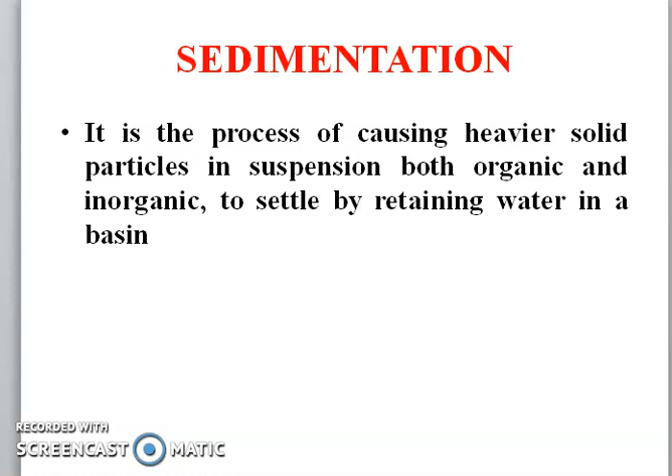Now we will study about water supply and treatment in the third module, sedimentation. What is sedimentation? It is the process causing heavy solid particles in suspension, both organic and inorganic, to settle by retaining the water. This is called sedimentation. It works on the gravity force. All the suspended particles will settle down. This is sedimentation.

The particles heavier than the water tend to settle down due to the force of gravity. Impurities in the water are held in suspension due to the turbulence of the moving water. When the velocity of flow is reduced, the suspended particles tend to settle down at the bottom of the tank. This phenomenon is known as hydraulic subsidence. This is the theory.

Particles heavier than the water tend to settle down due to the force of gravity. Impurities in the water are held due to the turbulence of moving water. When the velocity of flow is reduced, the suspended particles settle down at the bottom of the tank. This is the theory. Then we go to the next slide.

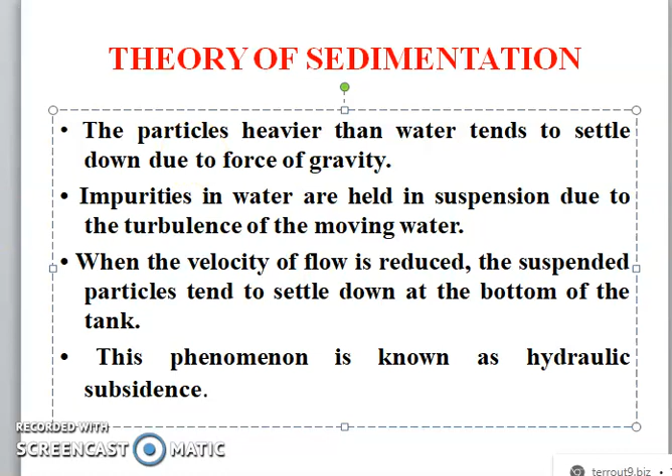Factors affecting sedimentation, very important. First, size, shape and weight of the particle. Viscosity and temperature of the water. Surface overflow, surface area, velocity of flow, inlet and outlet arrangement, detention period, effective depth of the settling tank, concentration of suspended matter, wind blowing on the surface area of the basin, and biological, electrical and other forces. These are the factors affecting sedimentation.

It's very important. Size and shape, weight of the particle, viscosity and temperature of the water, surface overflow, surface area, velocity of flow, inlet and outlet arrangement, detention period, effective depth of settling tank, concentration of suspended matter, wind blowing on the surface area of the basin, biological, electrical and other forces. These are the factors.

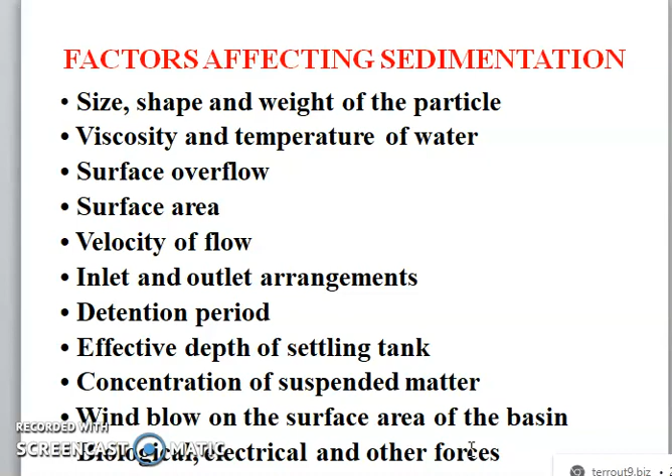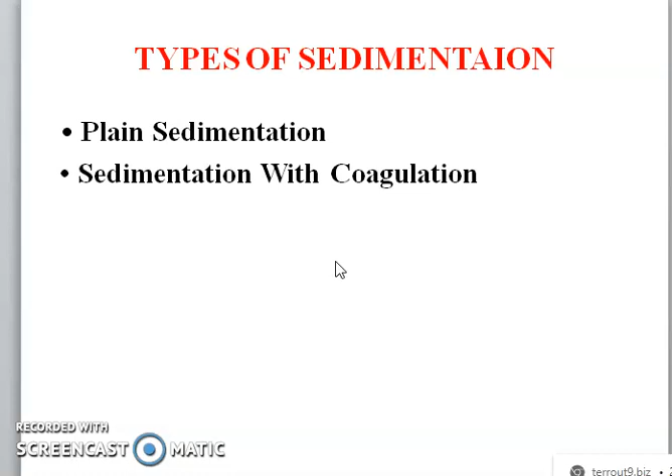Now we go for the types of sedimentation. Very important. There are two types of sedimentation. One is plain sedimentation, the second is sedimentation with coagulation. In plain sedimentation, without adding any chemicals, suspended particles come down due to gravity. It will take time, the detention period. In sedimentation with coagulation, we are adding chemicals to the water. It will help the water settle.

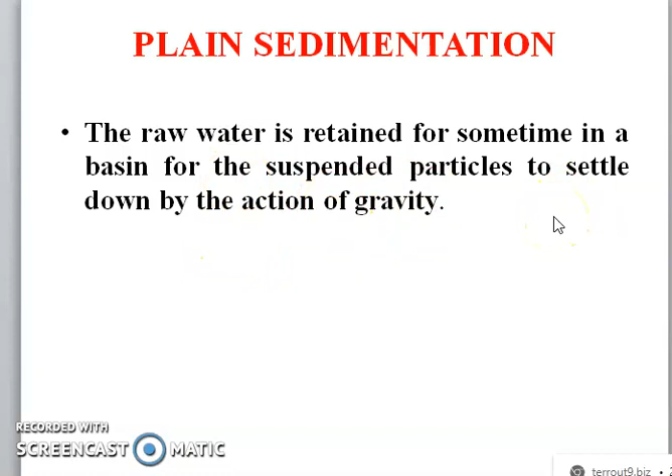Now, plain sedimentation. What is plain sedimentation? The raw water is retained for some time in the basin for the suspended particles to settle down by the action of gravity. This is called plain sedimentation. Sedimentation with coagulation: in this, some chemical compounds called coagulants are added to water to assist the sedimentation.

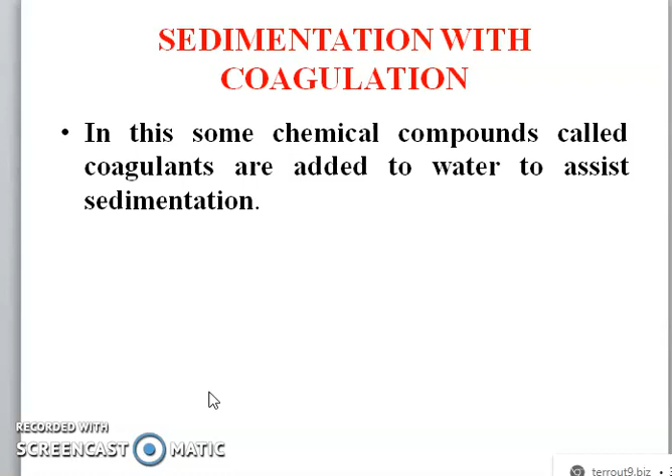Next, this is the coagulation process. You can see the slide. Coagulants are added to the water, mixed in powder or solution form. The coagulant forms a floc trapping impurities, like a ball shape. Then it will come and settle at the bottom. This is the total picture of how the coagulant works.

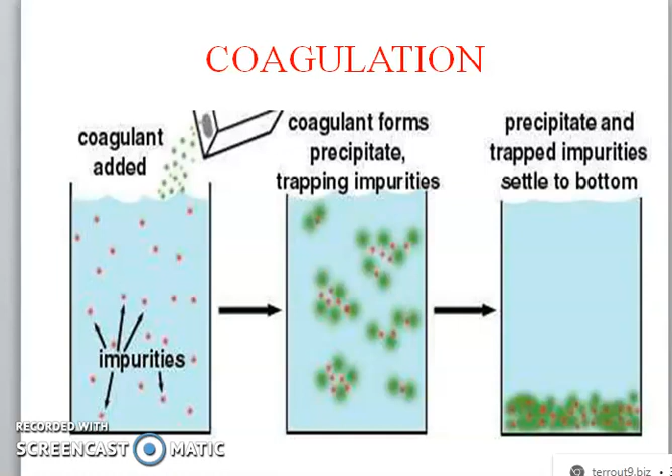Now, classification of sedimentation tanks. What are the types of sedimentation tank? In the syllabus we have: nature of working, fill and draw type and continuous flow type. Then direction of flow: horizontal flow basin, vertical or upward flow basin, radial flow basin, spiral or circumferential flow basin. First one, nature of working, fill and draw type, continuous flow. This is the direction of flow.

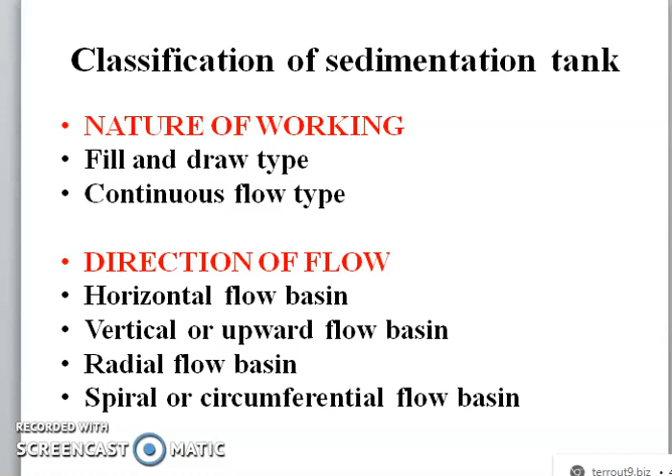Then we go for a very important one now, shapes. Two types, rectangular tank and circular tank. Two types, very important in the syllabus.

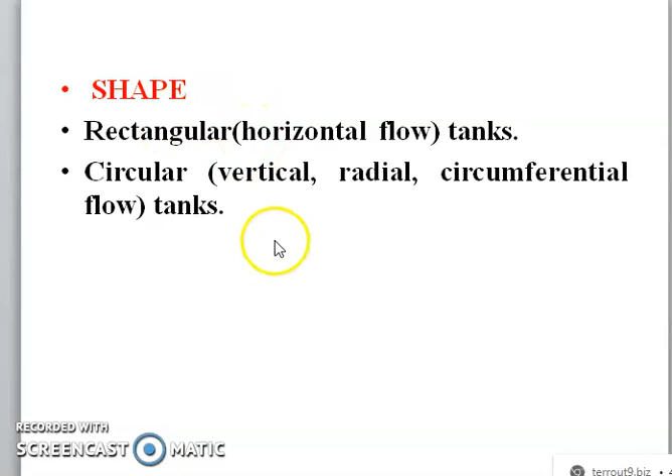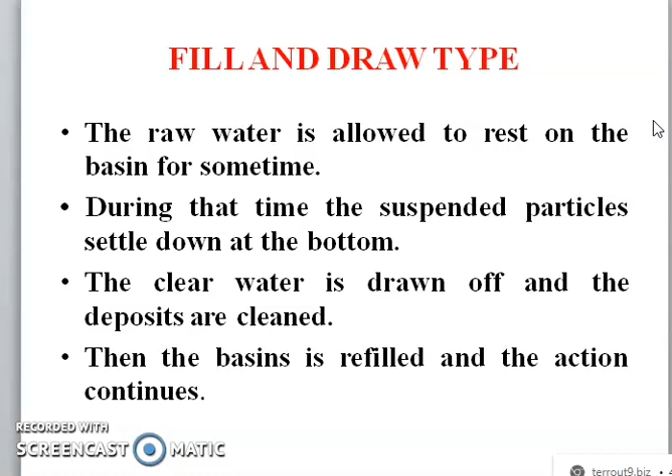First we go for fill and draw type. Raw water is allowed to rest in the basin for some time. During that time, suspended particles settle down, clear water is drawn off, and deposits are cleaned. Then the basin is refilled, and the action continues.

Now this is the fill and draw type: the inlet zone, then the settling zone, where all the sludge comes down due to gravity. All the suspended particles will come down due to gravity. At the outlet zone, pure water will come. This is the figure. Now there are two types.

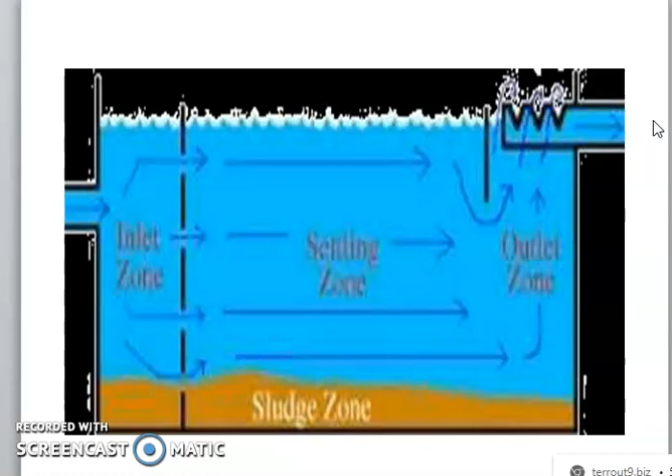Now we are told shape. One is the rectangular type. First one, rectangular type. It is a rectangular tank made up of concrete. It contains an inlet at the top and an outlet at another side. Here the sludge will come down.

Water will stay for 5 or 6 hours, depending upon the quality and quantity of the water. How much time it will stay is called the detention period. Here the sludge hopper is there, sludge removal is there. All the pure water comes up after the detention period. This is the process of rectangular.

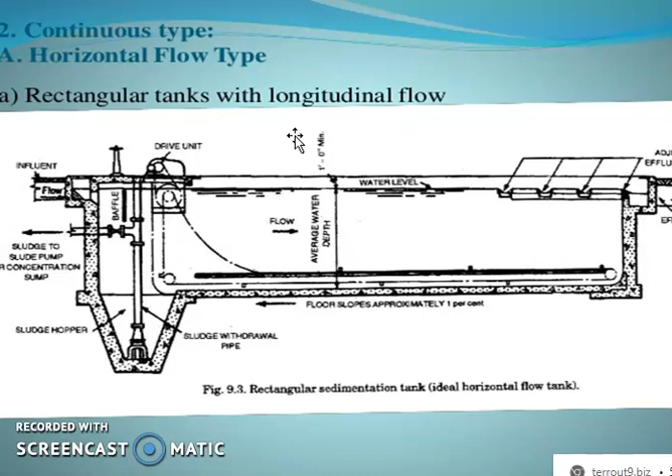Now we go for the circular sedimentation tank. It is a deep and circular tank. Raw water enters the basin vertically from the bottom through the centrally located vertical inlet pipe. The suspended particles settle down in the hopper at the bottom and are collected through the sludge pipe. This is the process of the circular sedimentation tank.

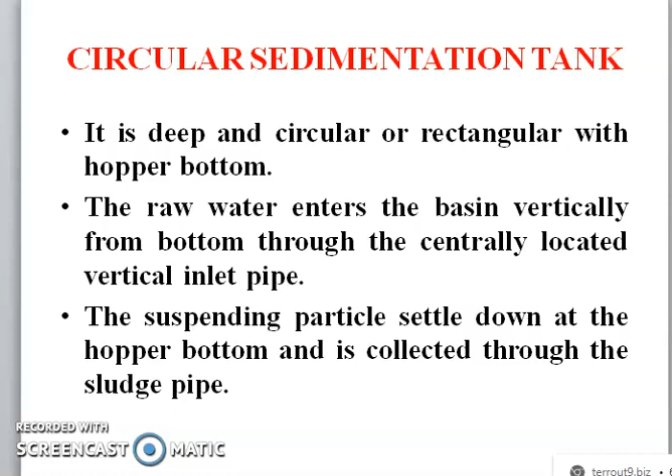You see this here. Raw water comes from here. At the bottom we can see this. Water will stay here. All the sludge comes down through the sludge pipe. Then clear water comes to the top, and it is removed from the outlet.

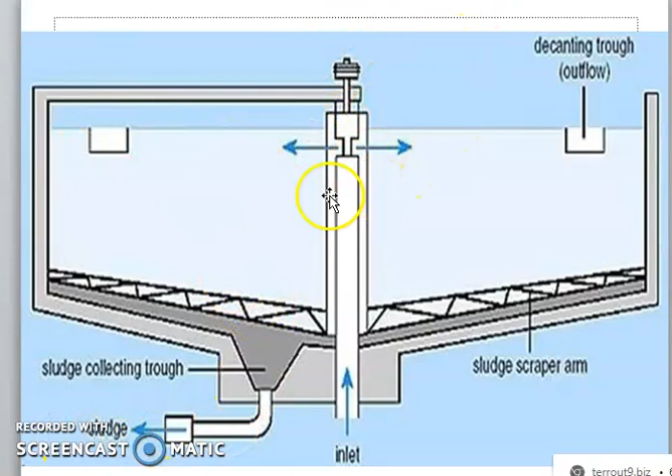Here is the explanation: water enters through the central inlet pipe. The inlet pipe is enclosed with a deflector box which deflects the flow downwards. Then the flow goes radially towards the circumference of the tank. During the radial flow, all settleable particles settle.

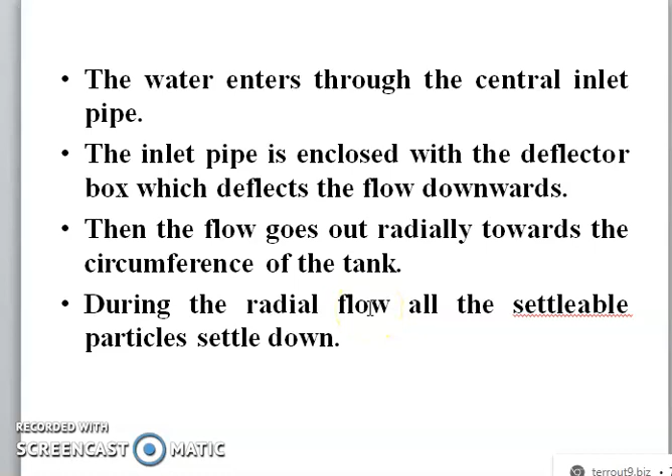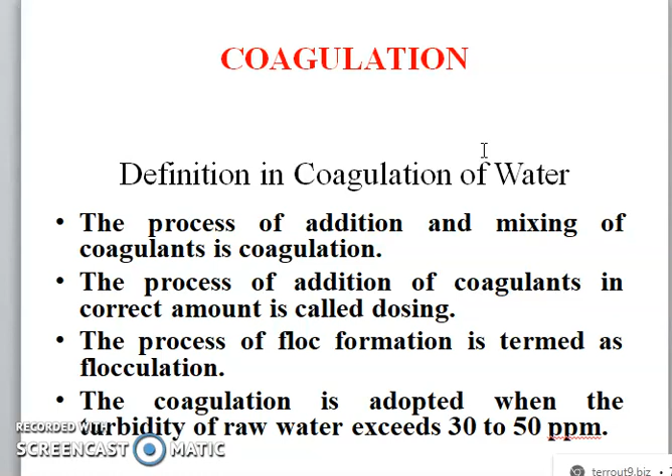Now coagulation, definition of coagulation of water. What is coagulation? We already studied plain sedimentation; now we go for coagulation. The process of addition and mixing of coagulants, the chemicals we are adding, is called coagulation. Adding the correct amount is called dosing. The process of floc formation is termed flocculation. The coagulant is adopted when the turbidity of raw water exceeds 30 to 50 ppm.

Objectives of coagulation, very important: to unite several fine colloidal particles together, to react with the impurities in the water and make them settle, to prepare the raw water fit for filtration, quick sedimentation, and to remove a certain extent of turbidity, organic and inorganic matter. These are the main objectives.

Unite several fine colloidal particles together, a very important objective. Make the impurities settle down, prepare the water for filtration, the next process, quick sedimentation, and remove the turbidity and organic matter. These are very important objectives.

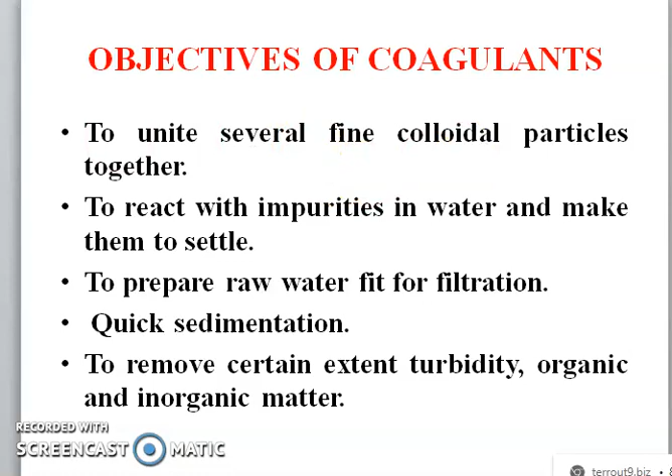Common coagulants we are using: sodium aluminate, ferric chloride, ferric sulfate, bentonite clay, fuller's earth, magnesium carbonate, and polyelectrolyte. These are the common coagulants we are using nowadays.

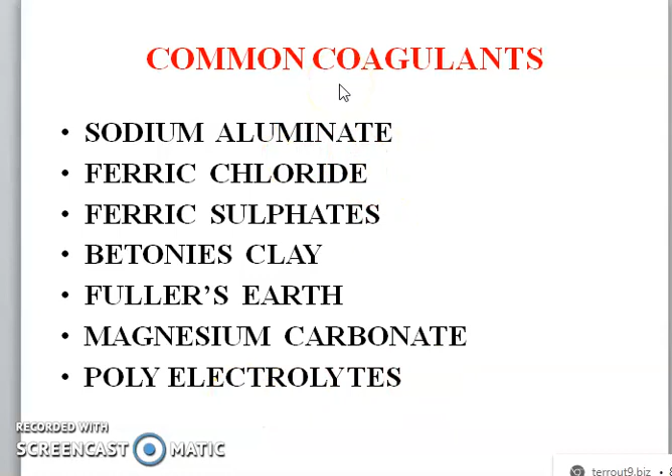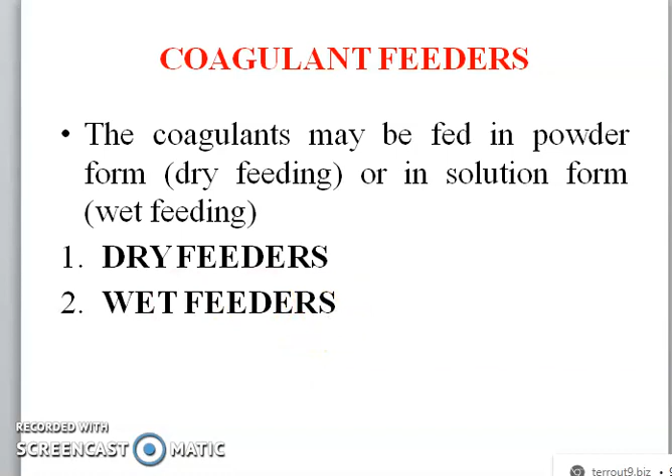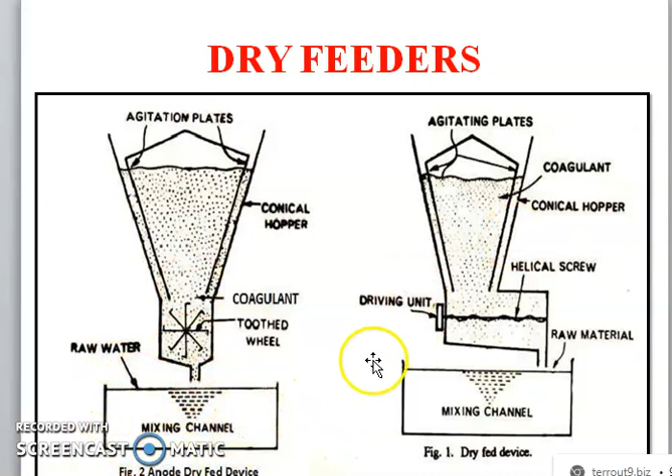How will we add the coagulant? There are two types of feeders: dry feeder and wet feeder. In the dry feeder we add dry powders as a coagulant. In the wet feeder we add the solution. We can see the dry feeder here. Here we have the conical hopper with powder. The powder comes to the raw water mixing channel. In powder form we are feeding this one.

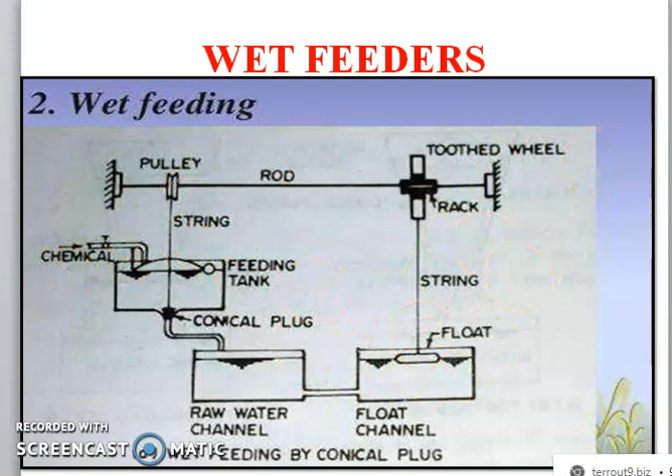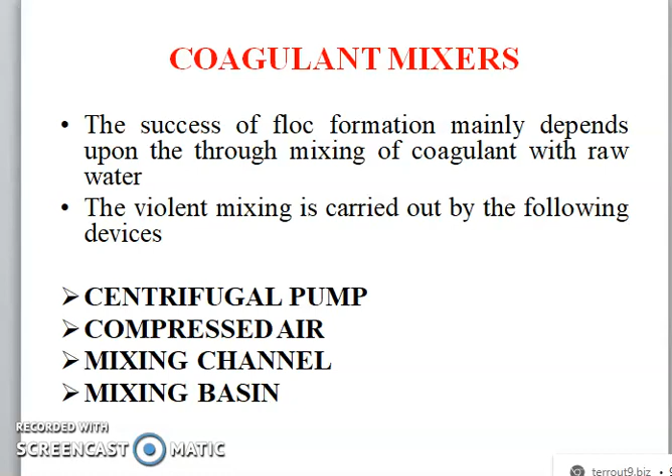Next we go for the wet feeder. The solution is added to the raw water. This is called the wet feeder. And coagulant mixing: after feeding the coagulants, we have to mix by a device such as a centrifugal pump, compressed air, mixing channel, or mixing basin.

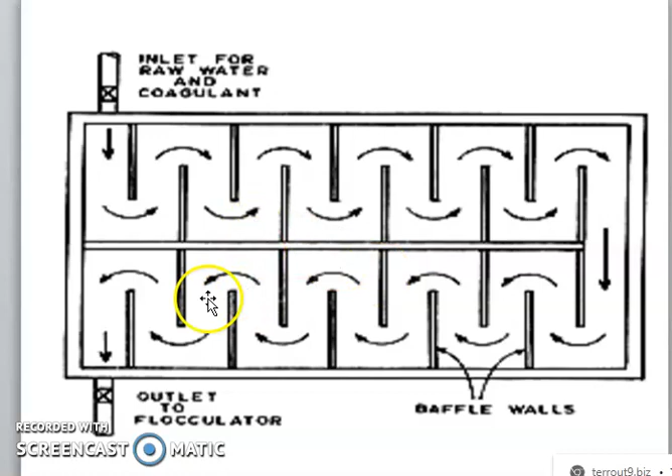Now we can show the mixing basin with the horizontal type and vertical type. This is the mixing basin. After feeding the coagulant, the water will move in a zigzag way and come out. This is the mixing.

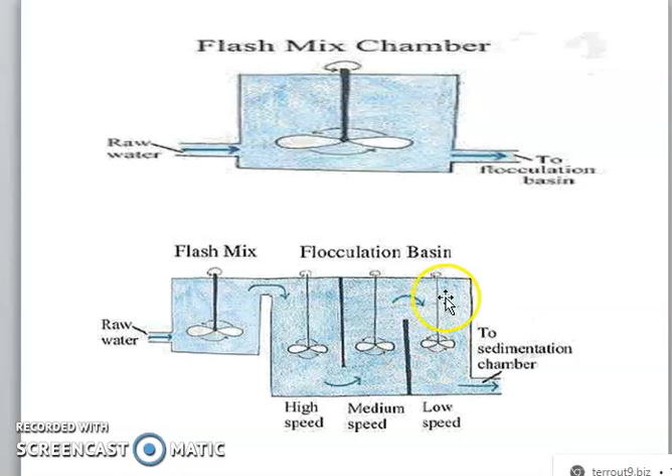Now dosage of the coagulant, very important. It depends on the kind of coagulant, amount of coagulant, time of mixing, violence of agitation, time of settlement, amount and characteristics of color, turbidity of water, pH of water, and temperature of the water. These govern the dosage of the coagulants.